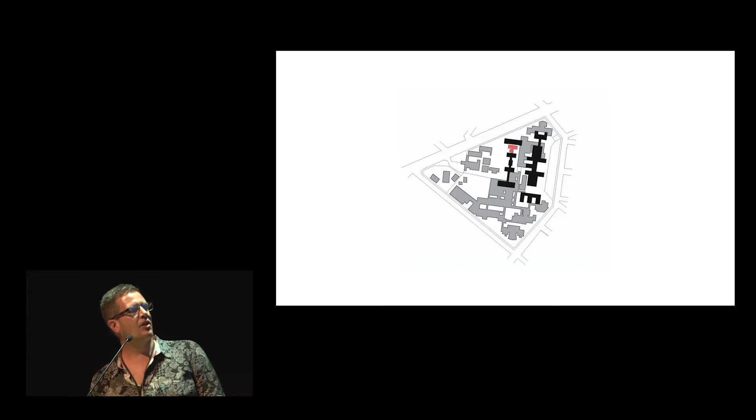So the building is funded with donations. It's a project that took many years to realize, in terms of the doctors working to try and get this facility built. The budget is extremely tight.

Our strategy was to take the logic of the original building, the inherent logic, and to copy and paste a building next door. It's obviously a little bit different, and it needs to respond to its specific brief, but we treated the central moment of that building as something special, a space where people gather, meet, and where public culture and public life are celebrated.

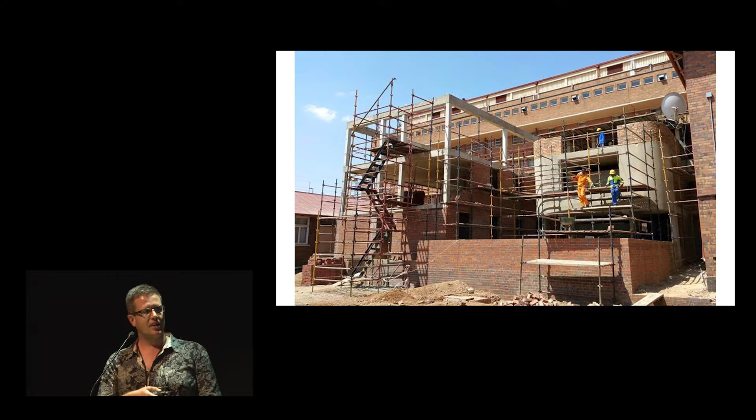This is the building going up, and this is the central piece, the space of gathering.

We worked with a local artist, Lorenzo Nassimbeni. He has practiced as an architect, but he's now a well-known artist, and we worked with him to develop a concept for how to resolve the facade of the central building.

We took our clues from the landscape that the building looks onto, from the surrounds, and traced those back onto the building, so that the image seen is the image that makes the building special. It is made from its context and is recognized from that context.

These are some of the details that we developed on that facade.

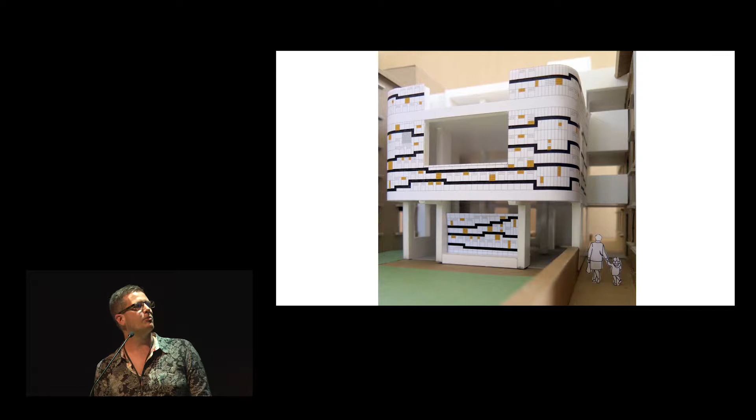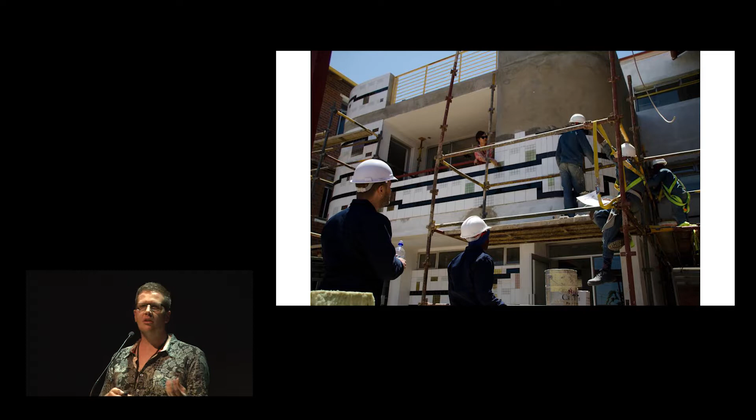So here's the project going up. We worked with Lorenzo, the artist, and with a local construction company that specializes in making very meaningful works, very carefully made buildings.

What's quite important is that within this landscape, you come around and you find a home, and it's very powerful for us to go back there. We go back every now and then, and everyone is so warm and welcoming, happy and proud of their space, proud of the space they built, in the sense that it's a project they funded, worked with us on, and conceptualized with us.

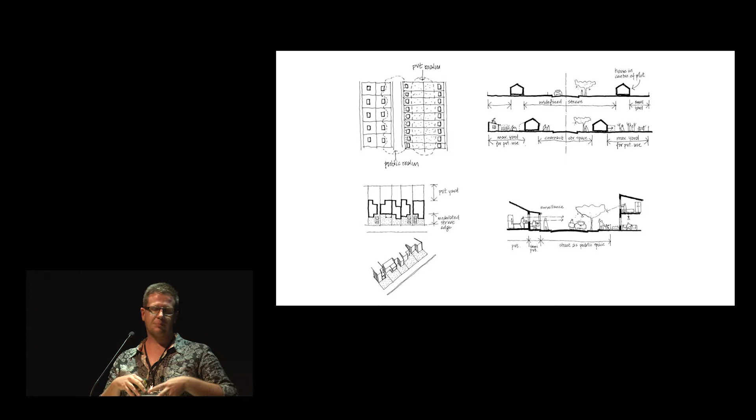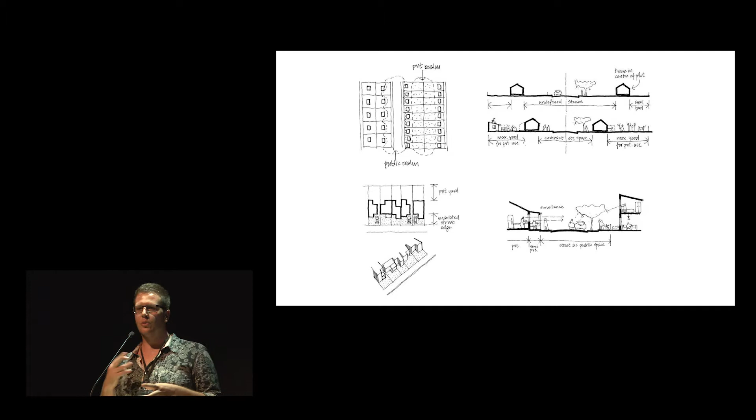It's really just a copy and paste of the same thing. It's far away from city spaces, and with the Lufhereng project, the brief was to design something that is not just the everyday RDP house. So an urban design strategy was developed, and there's a whole framework for schooling that is meant to come into this area: public transport, medium density housing, bonded houses. There's areas for work, areas for artisanal creation, small scale industry. But all of it has fallen flat. About 2% of this project has been rolled out, and it's stuck.

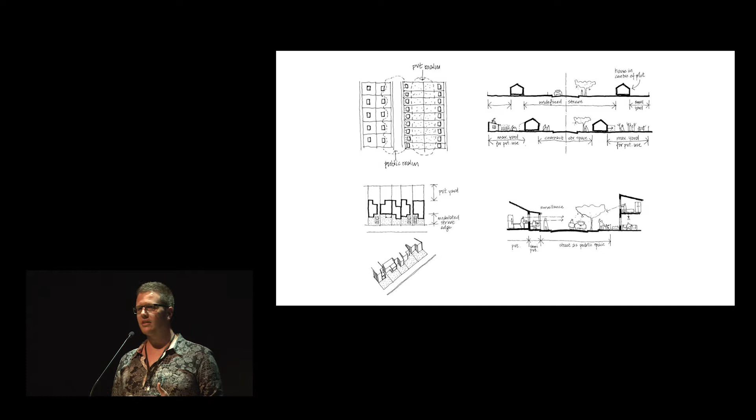It's stuck in a bureaucracy where the plans are not approved. These houses were built in 2010, and the city of Johannesburg has not been able to process the approval of these plans until this year, meaning that the people living here do not have title deeds. They do not have a legal right to add on to their buildings or convert them into income-generating assets.

So this is a project that is a failure, but has many things that should be good. And I put this project out here as a question to myself and to all of you: how much can we do as professionals within a world of the bureaucratic? We can maybe discuss at the end.

The other reason I've put this project up here is because we were approached by the Museum of Modern Art in Louisiana to do an exhibition of this project. After it was finished, the Architectural Review published it, and it is somehow known in Europe. They wanted to simply put it on display as housing, as housing in Africa that is doing something slightly different, looking at row houses and stoops, etc.

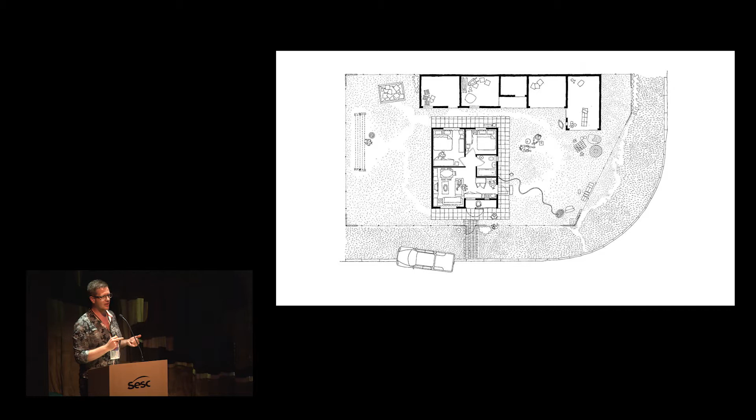This is very important for us because we still have links to the developer, who has tried to get rid of us as architects because we fight about wanting to put balconies on, and we fight every time they want to push the house further away from the street and separate it out. There are many different typologies in this project, and they keep trying to erode them and make them fall away.

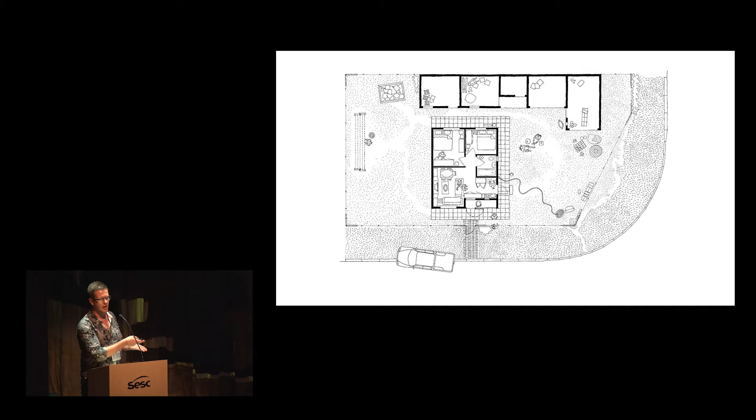So this is a very powerful study for us because it means we can go back and see how people are using spaces. We can see the backyard rental structures that people are building for themselves despite these not being legal, despite being an informal system. And we can see how houses become businesses, how this becomes a bar, a tavern in front of a house where someone makes and generates an income despite being on the margin of a city, and despite being in a city that is never realized on an urban design plan level.

The third and second last project that I want to share with you is a student residence. It's at the University of the Witwatersrand in Johannesburg. It's a student residence extension on the university campus. The campus is completely walled off with very restricted access. It is in the city, but it is disconnected from the city.

In this campus, there is a belt of residences on this end, and this is the Barnato Hall residence. It is a fortification. It was built in the 80s, toward the end of apartheid, at a time of great crisis and fear that the campus would be run riot with civil war and protest. So it's filled with these towers, and it is impenetrable except for one entrance.

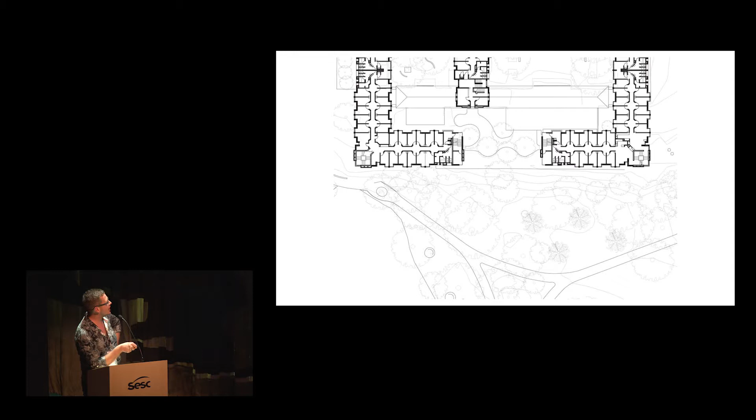We wondered about the fortification and eventually resolved to try and break open the space via a series of smaller, intimate courtyard spaces. You'll see when these come together.

So this is very important. There's a lake nearby, there's a park here, there's a very old big tree. The students love to sit here, they have drinks, they braai, and they cannot get from the building to the space.

So we broke up, we created a secondary courtyard, we created a series of views through the building, and this is the lake, this is the view out.

And then in that process, we needed to develop and detail this dumb box, as I call it. So we worked with the local brick manufacturing company. They have a graveyard of bricks under the tree that are specially commissioned, and these are the leftovers that go to a site to waste away. We managed to secure a very good price, cheaper than a stock brick that you plaster.

And we developed a kind of weave, a weave that breaks, that matches yet breaks, that builds itself out of the condition of the fortress.

This is a drawing. We drew up many options on this facade, and we essentially wrap this building in a kind of blanket.

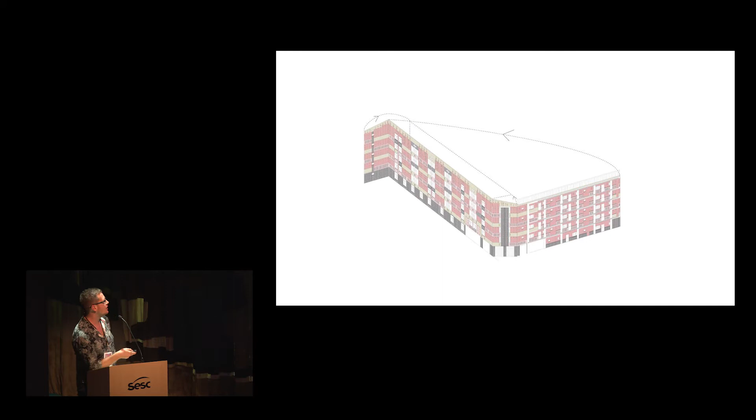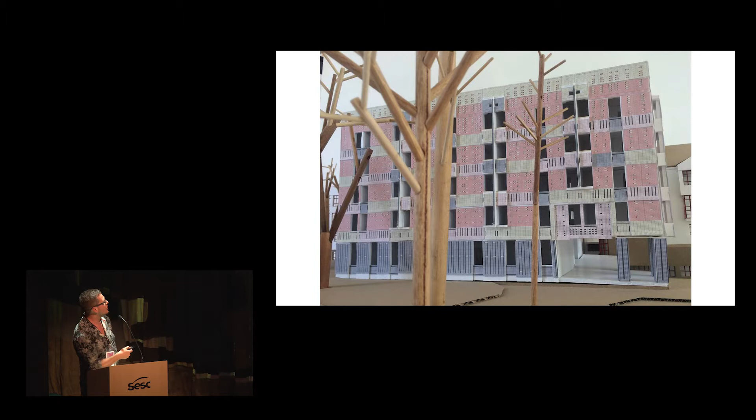And we love to work with models. We develop these models, and this was important because part of this project was about upskilling, dealing with the need to reskill our community and ourselves, where we are untrained in the artisanal trades of bricklaying, woodwork, etc.

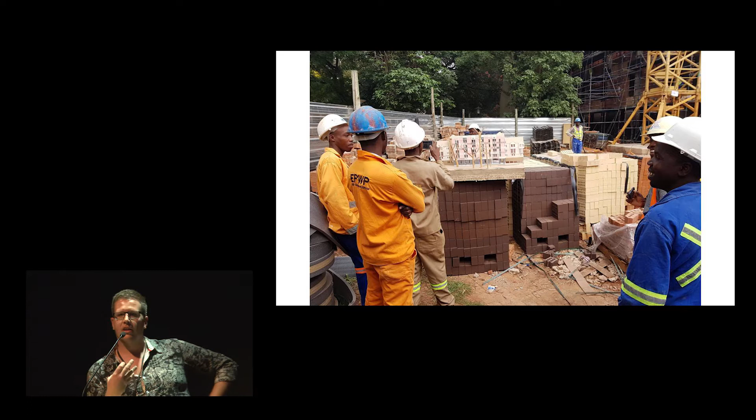This is Tebogo, you'll recognize him. He worked with us on the training process and on-site workshopping of details and facades.

And then we go back, we talk to students. So we got some feedback from students who found it very interesting to understand the story behind the brickwork.

They pop up slightly, and you have no idea how hard one has to fight for a small intervention that allows an extra view out of your room, an extra experience of a lake. You're living there every day in a 9 square meter room, and it's impossible to give that little bit extra under an austerity measure.

So we're quite pleased with the courtyard and with the way we're seeing it being used. I think there needs to be some post-occupancy study as well. But this is a space that at its completion, it's filled up this year, so these were photographed toward the end, around the completion of the project.

But it's little things. It's a stable door at the entrance where someone can walk past and feel like they're not intruding when they're saying hello.

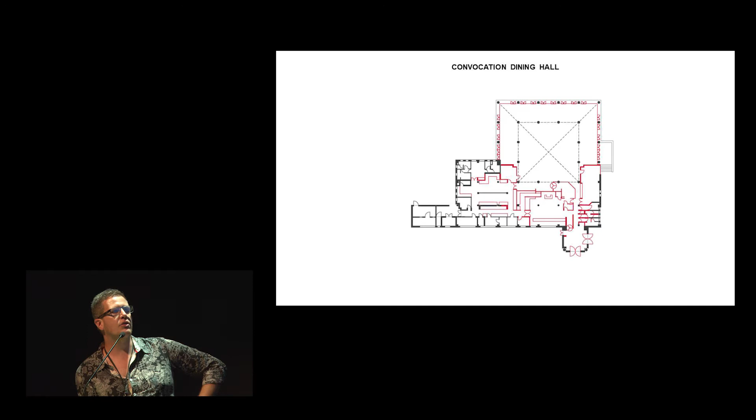So I think these are just some dining halls around the residence. We worked at the neighboring dining hall, and again we look at a kind of institutional space and a respatialization where you combine food and eating. This is the dining hall to Barnato Hall, so this is just a small side project in that.

So the new res is different. I think it allows you to socialize more with communal space, unlike the passages of Barnato, where you get lost. I've had nightmares about it. For the last project, since I have no time, I'll go through it extremely quickly.

This is about occupying a suburb, a first-ring suburb of Johannesburg. We call it the 495 city because around Johannesburg there are a lot of sites that are all the same size and have the same typology of a single-story standalone house. Within a 10 kilometer radius, we're looking at a massive portfolio of property that's all exactly the same.

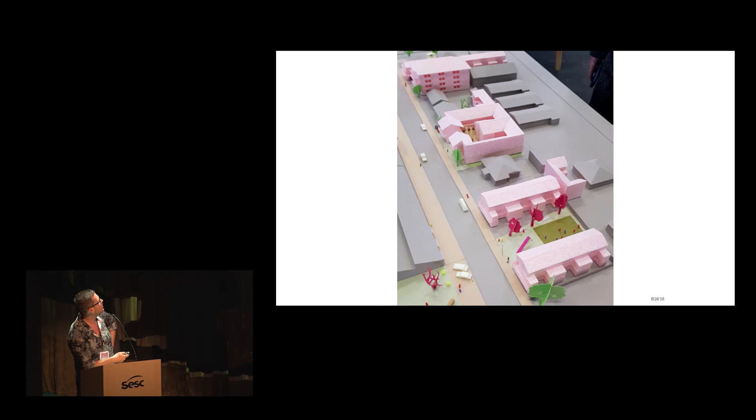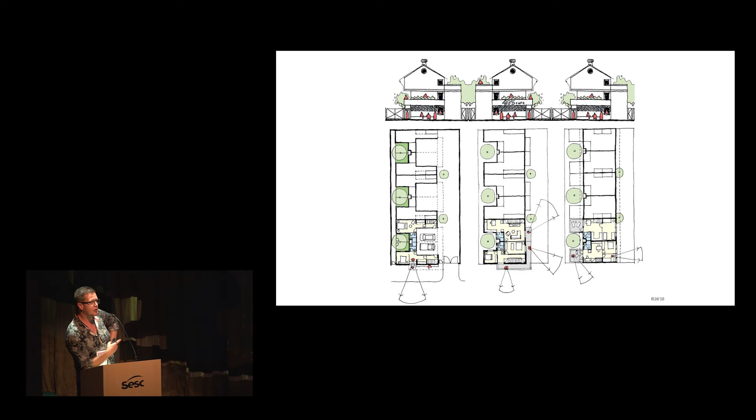We have a duplex type where people can essentially purchase or rent a unit, a 3-story unit, but if they purchase it, they can rent out various sections of it, and over time develop and build and eventually make it their whole house as they move up within their own financial means as they develop and grow. This is the duplex typology. I won't talk too long about it. We have a micro-unit typology as well.

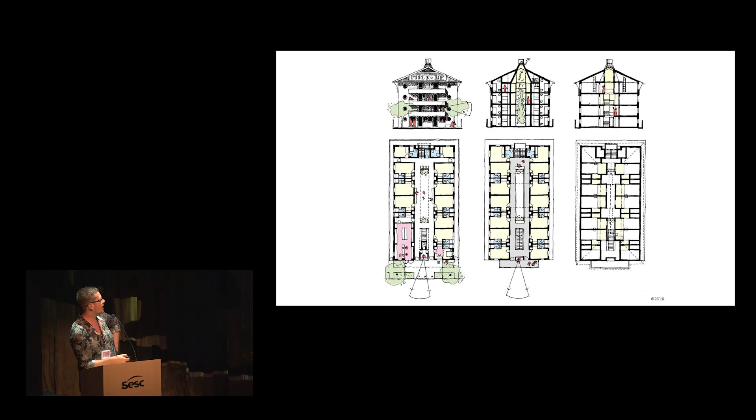This is very much a typology that looks at single room dwellings, a very big need in Johannesburg, and looks at how one can densify a site as much as possible while still retaining street interfaces, connections through balconies, and the opportunity of shops on the ground floor or work-from-home units on the ground floor.

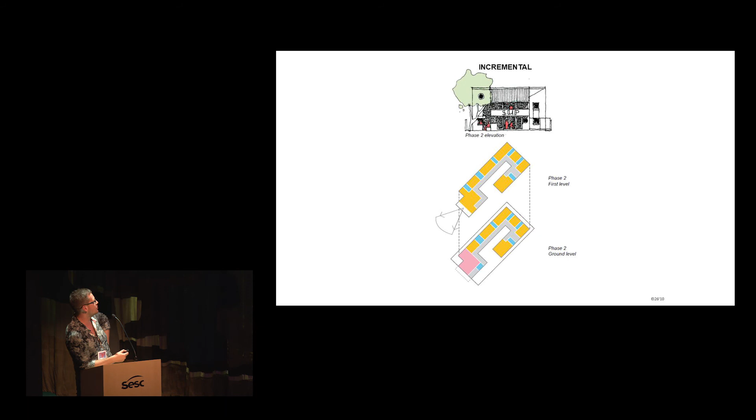The final typology we are looking at is an incremental growth strategy where you take a single-story house and work with what is already being built, the backyard structures that can then grow and multiply over time to establish a building that interfaces with the street, that empowers someone who has access to an old house that's falling apart, letting them build over time.

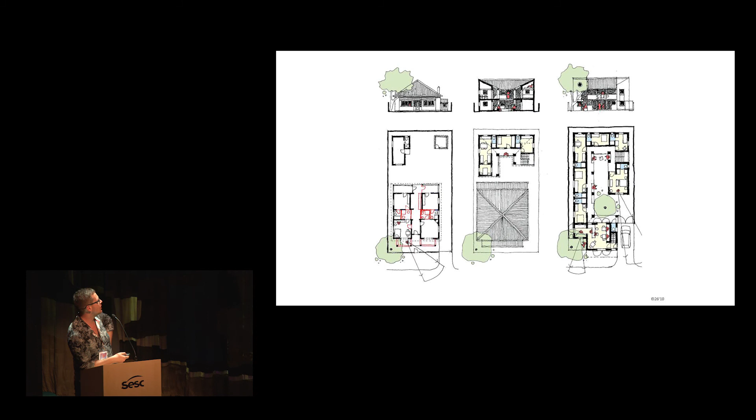This is a very short video by one of the students from the University of Johannesburg that I worked with in 2017 on her idea of how you can grow a suburb, building where these internal spaces become courtyards and memories and traces of what used to be, where windows that once looked out now look in, catering for a community to connect, socialize, live and thrive.

I'm completely out of time, but I think this is the city we dream of. We dream of a city where people can connect, where people can work, where they can play, where they can grow, where they can love, where they can release their tensions, and where they can thrive and build themselves. Thank you.